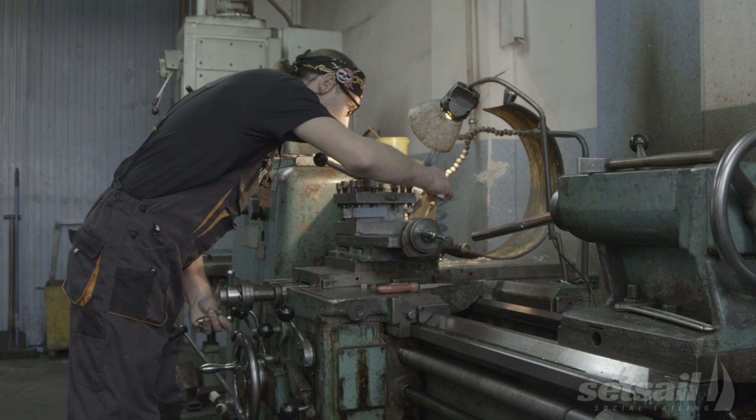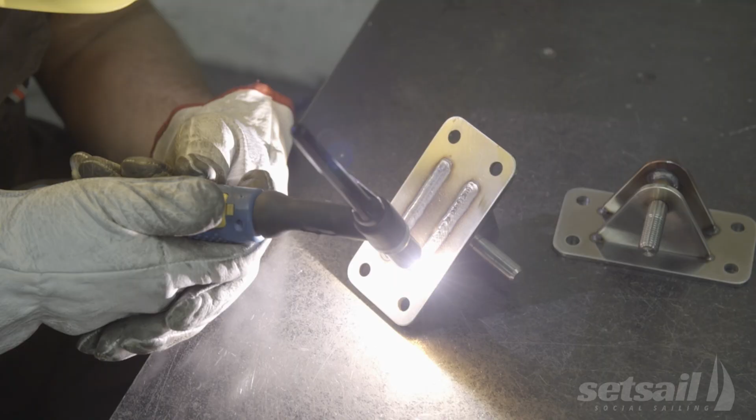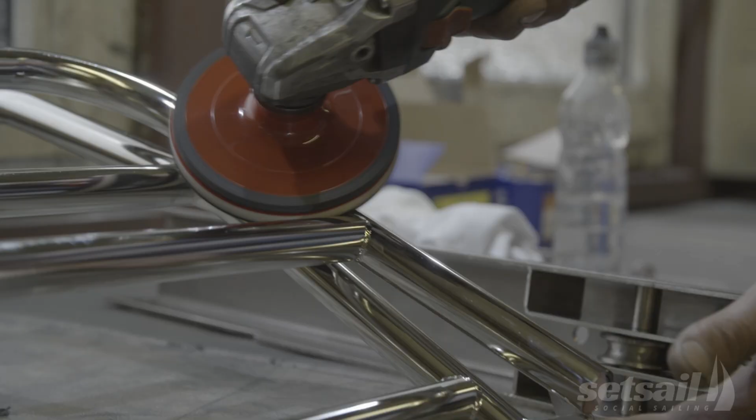The process begins in our ironworks. Our fittings are made here. We make all of them ourselves. Each element of the yacht is precisely designed. We see the welding post. We weld with TIG, which is a modern welding technique. Each of the elements we handle is bent, cut, ground and polished. Proper preparation of the steel elements is a very important stage, preceding the works on the creation of the hull.

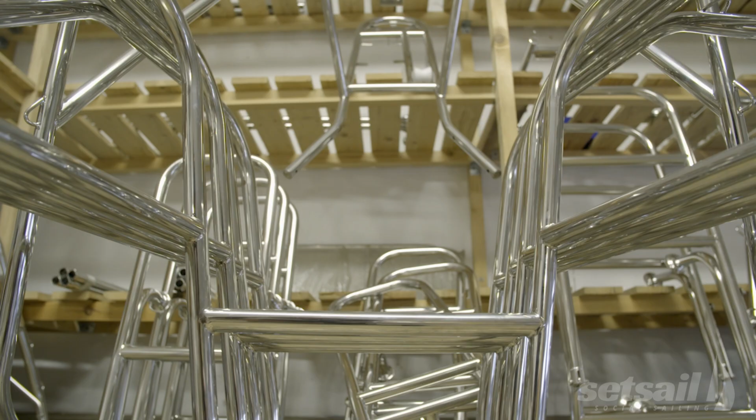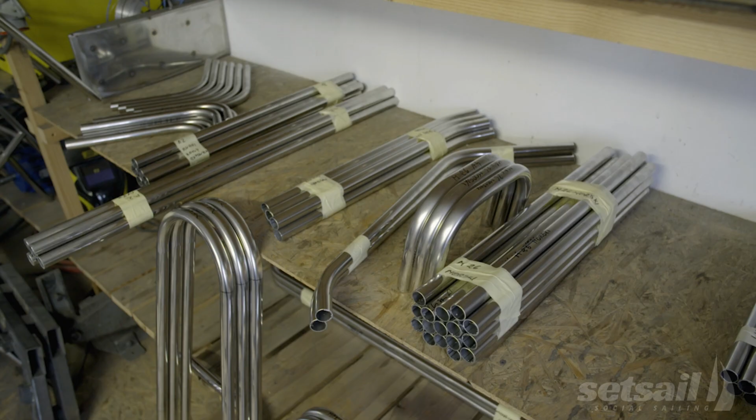Most yacht shipyards don't produce these elements, but order them from subcontractors. However, this shipyard has its own ironworks, where most of the fittings for the yachts produced here are created on the basis of the sketches and models prepared by the designers. Only the highest quality steel resistant to aging and tough weather conditions is used for their production.

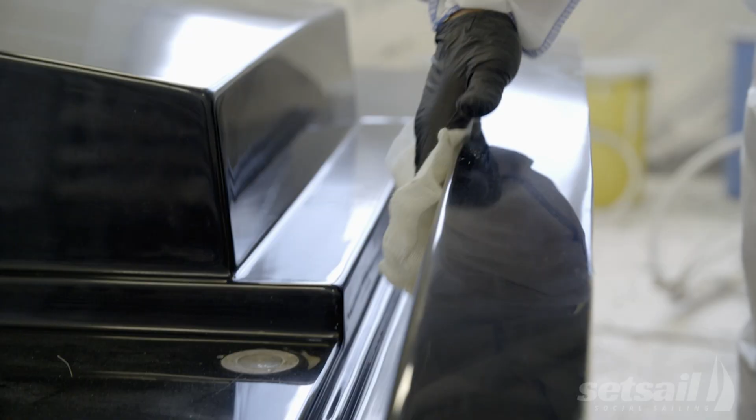The preparation of the product form is currently in progress. The varnishing machine operator has to clean it like a mirror. They have to remove all specks from its form so that the varnished form, when removed, is nice and clean, not having any stains or contaminations. Next, the product will be varnished.

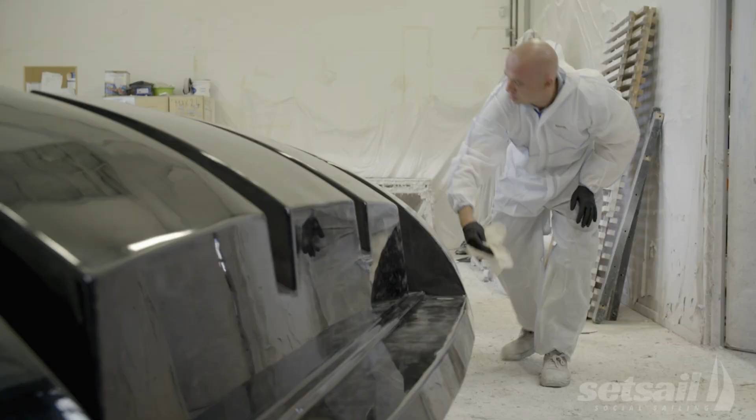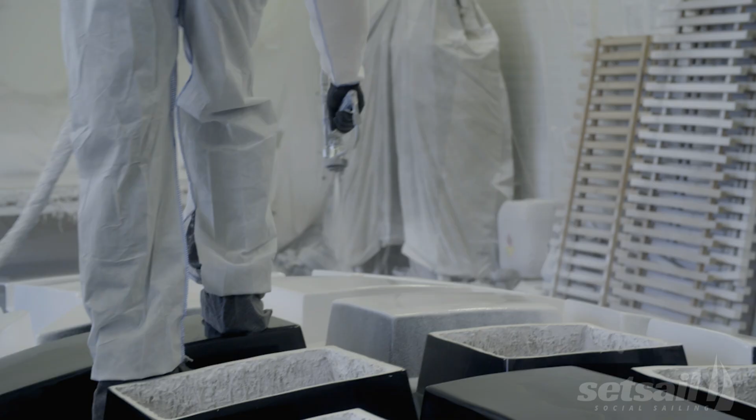An appropriate layer of gel coat will be applied. Then, we'll take measurements in various places. This is mandatory. If this operation is successful, we can apply the mat on it. If there are any small flaws in the form of incorrect, inadequate thickness of the gel coat in some places, this form has to be properly varnished.

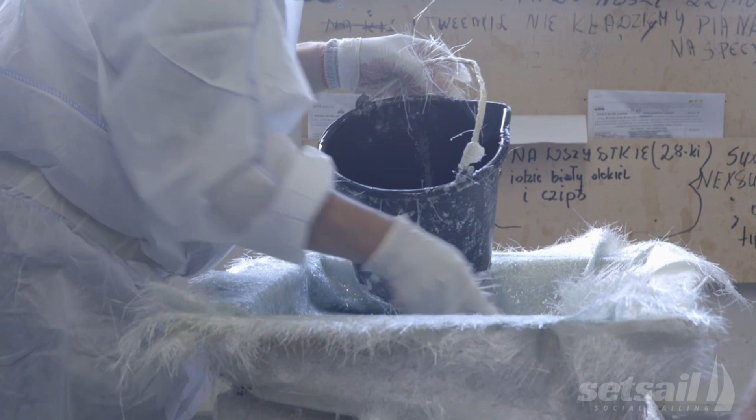The preparation of the form and the laminating process is handled in a separate zone specifically prepared for this purpose. Laminating consists of covering the product with a glass fiber mat and saturating it with a special synthetic resin. Resins used for laminating are flammable, and inhaling the vapors created during the laminating process can be very dangerous. This is why the crew in this zone has to work in special masks and wear protective clothing.

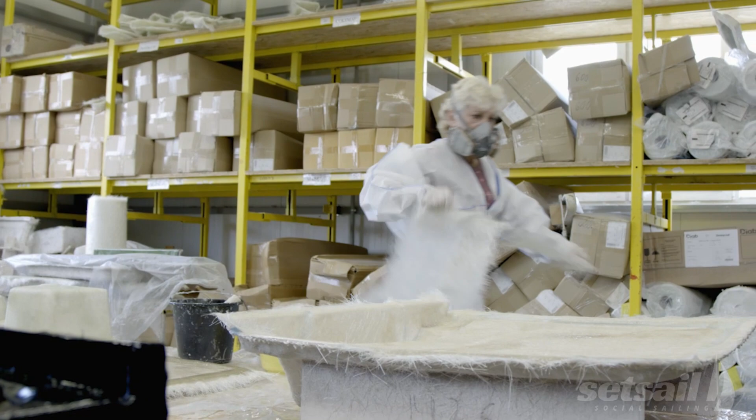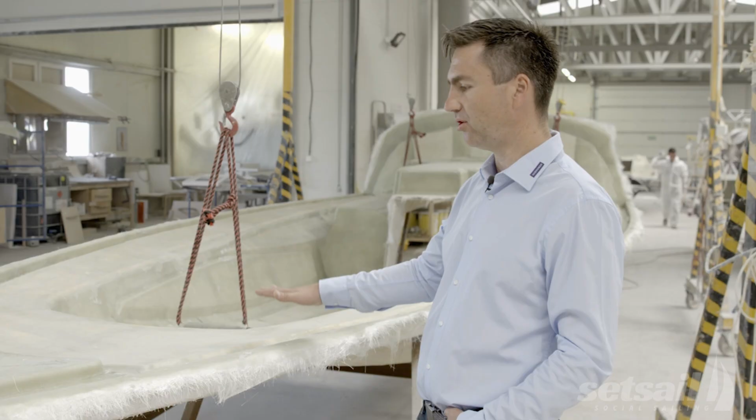The workers manually apply subsequent layers of laminate. The resin is applied and then squeezed into the fabric with the use of rollers. The point is that the resin has to perfectly saturate the layer of the glass fiber structure. We've got here a finished product which went out of the laminates department and is now at the gluing department. This is the Maxus 26 deck.

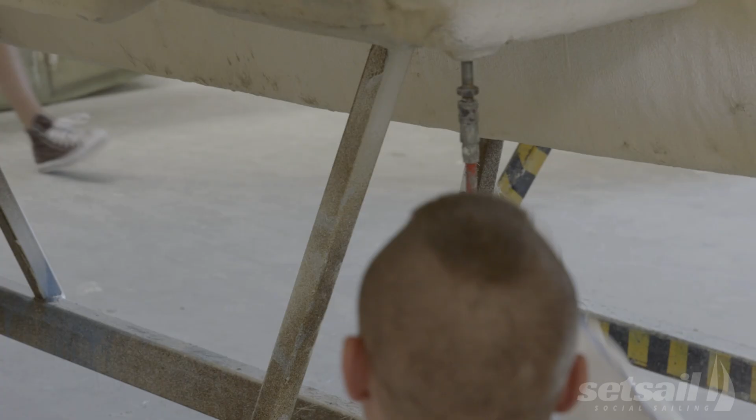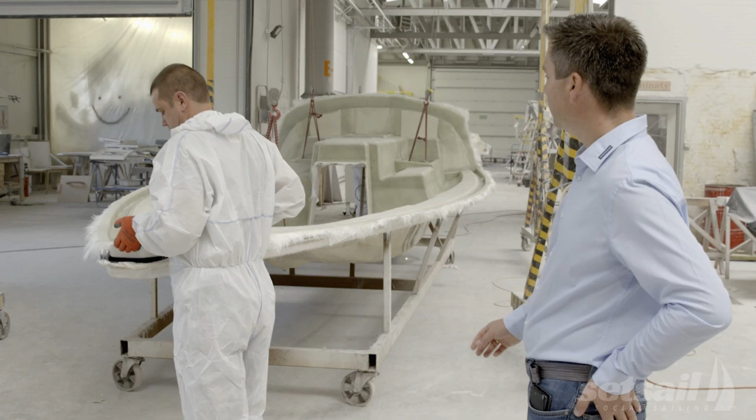It already has a full mat diagram placed. It's also equipped with reinforcements, which will later on be used for fastening all the fittings. We've prepared this product to unform it, meaning remove it from the form. You can say that unforming goes pretty well. The waxes were applied properly, and in a moment we'll blow compressed air inside the form and hoist it up.

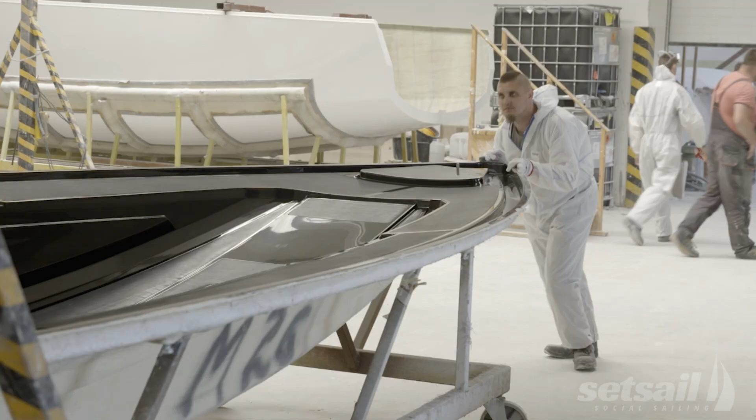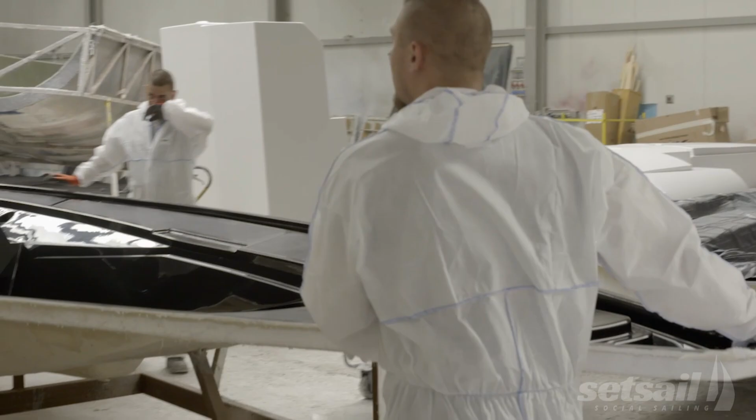In order for the laminate to reach appropriate stiffness and durability, the lamination process is often supported by vacuum pumps, which help press subsequent layers and get rid of air bubbles. A well-made laminate is a very durable and resistant material. This is the basic method of building contemporary yachts.

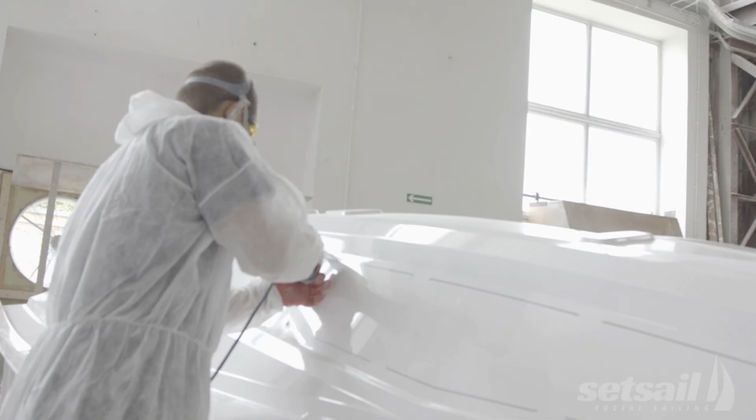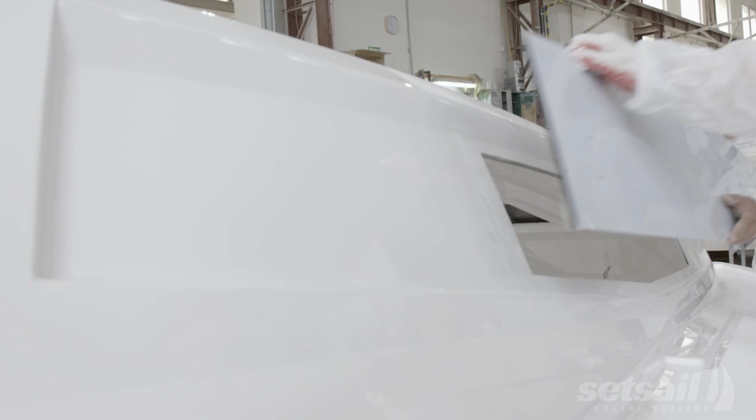Now we see how the varnished, unformed product looks. How important are all the nuances, details, which we have completed before. How important it is that the person who laminated it did all the tasks very carefully, so that everything's filled perfectly. There are various embossed areas ready for windows, which we will cut out later. The anti-slip surfaces on the deck are already prepared. This is a ready sailing yacht deck.

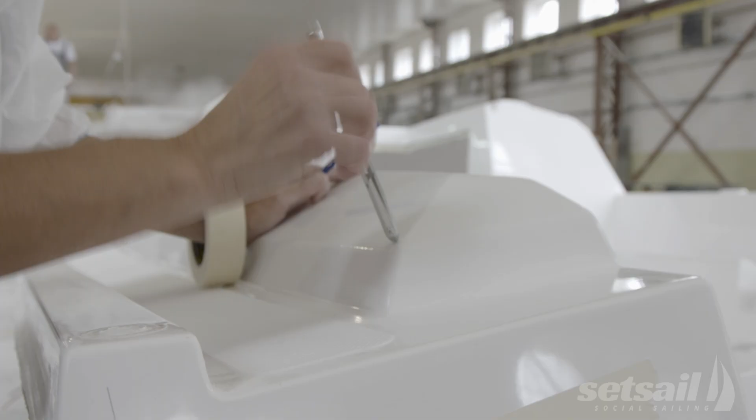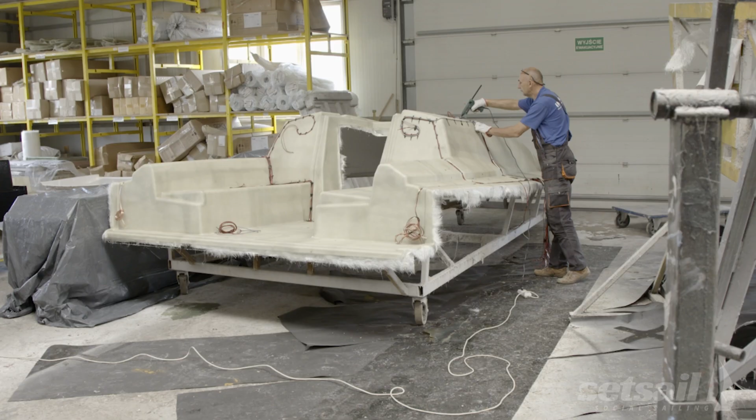After unforming the product, excess laminate, which is covering the surface, has to be cut off. After completing this task, you can proceed with the control of the product. In a moment, the edges will be cut off and all the necessary holes will be carved. Then the workers will prepare the surface for gluing the roof lining, on which the wire harness is located.

Our hull's ready, unformed from the form. We've transported it with the hoists to the gluing department, and we are going to put it on the prepared surface now. This is where the gluing process will take place. Before this process begins, we have to level this bed, profile the hull, and only then can we glue the product on the ready bed.

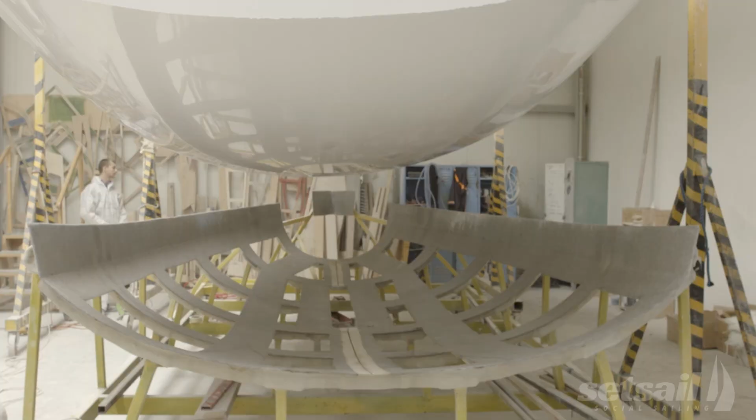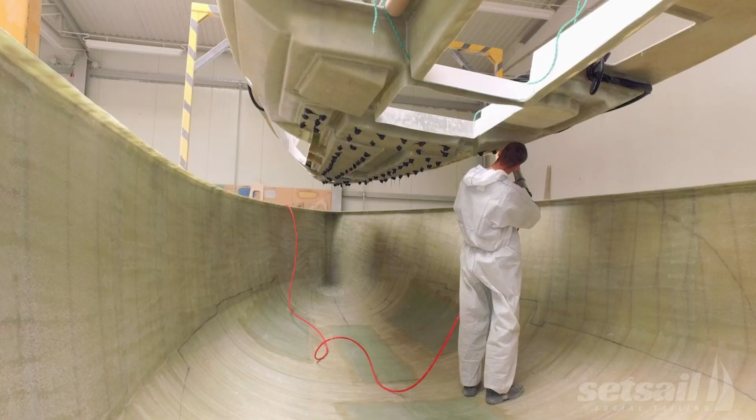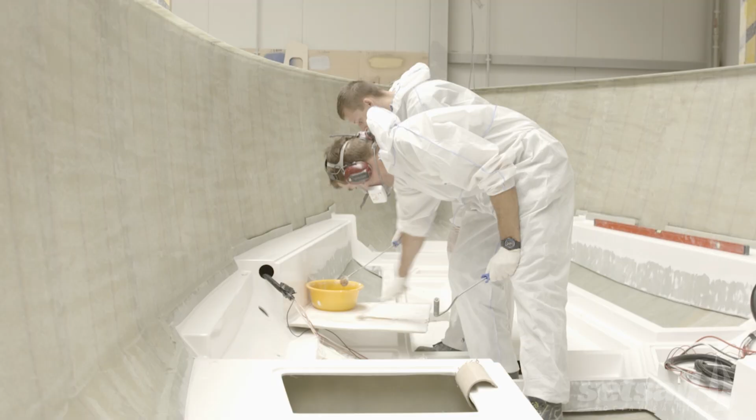The hull has to be perfectly compliant with the project. Leveling and profiling the hull is the most important thing after removing it from the form. Laminate with such a surface bends and twists. You should set its parameters in compliance with the documentation and glue the reinforcements, bracing, bulkheads, or as in this case, a bottom pad in the specified places. The hull will get its full stiffness only after gluing the building elements and connecting them with the deck laminates.

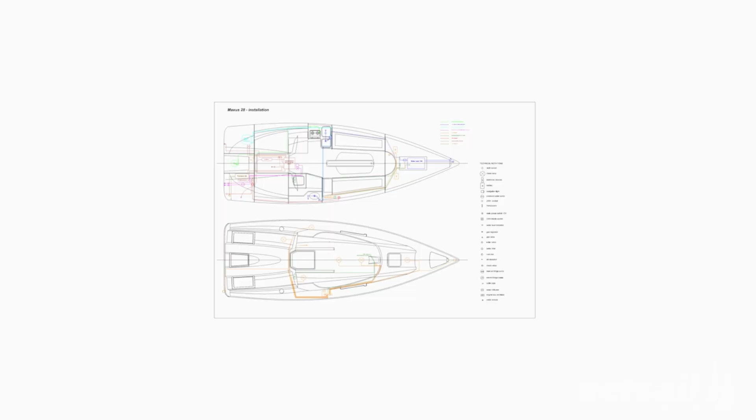Before a yacht is made, first its concept has to be created. We get an outline of such a yacht, how it's supposed to look, from our designer, who currently is Jacek Daszkiewicz. We get such an image in 3D. When the first drawings of such a yacht are ready, we are able to compare it to the previous projects and to the trusted, or not, technical solutions. As soon as we get full acceptance, we proceed to drawing the yacht in full detail.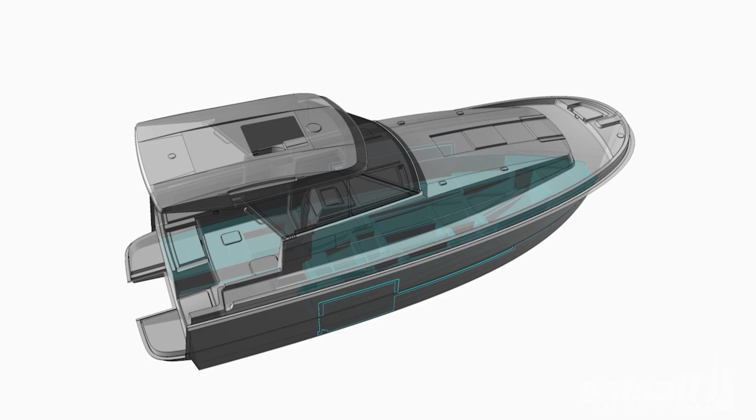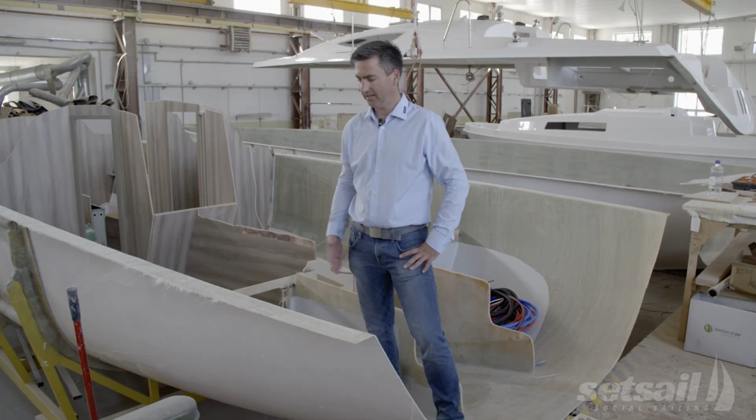We're in the yacht structure department. The yacht we can see is the Maxus 33, the biggest of the yachts we produce, in which the partitions and separate elements were placed in the bottom pad, which you've already seen during the previous stages. We can build such a yacht in any color. This is water-resistant plywood covered in HPL laminate, much more resistant than natural veneers. Finishing this yacht will begin after gluing the entire hull with the deck.

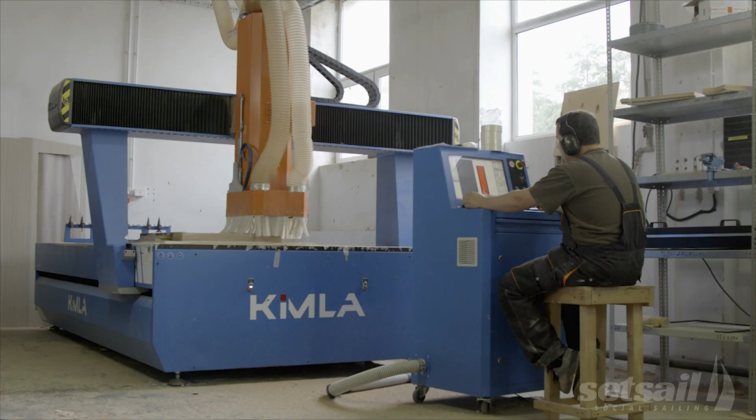All the structure elements are made here, in the carpentry shop. It's here where the material is prepared. The water-resistant plywood boards are glued with the HPL laminate imitating the type of wood chosen by the customers. HPL doesn't differ visually from natural veneers. It's more durable and resistant to moisture. The structural elements of yachts are milled, cut and painted in compliance with the specifications ordered by the customers and then mounted on the hull.

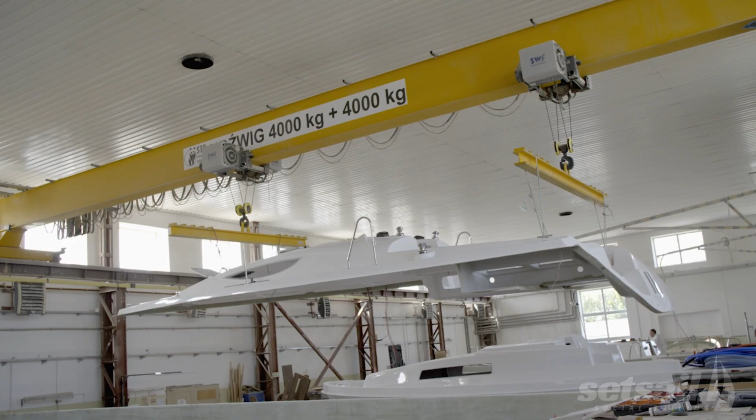You can see a prepared deck, which is transported with a crane to the post where it'll be prepared for gluing. It's too heavy for us to lift it. The edges will be polished, their connection places will be marked out, and it'll soon go back to the post here to be glued. Connecting the deck with the hull will be done by applying a layer of glue and squeezing these elements against one another.

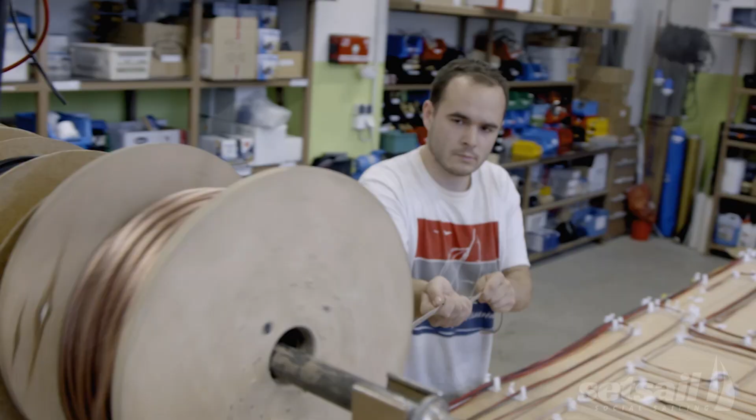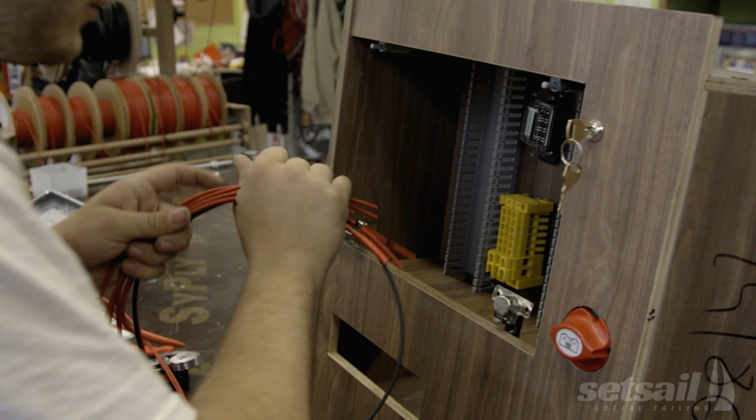Before connecting the deck, let's visit the electricians. The wire harnesses are made here and various devices are prepared for mounting. Contemporary yachts must be safe and comfortable. That's why they are equipped with more and more devices, from lighting through navigation and measurement devices up to sanitary installations. All of these require electricity. Electrical harnesses are mounted during the gluing and on the stage of mounting the hull structure. Here, most of them are already in place.

Now you'll be able to see how the connection of a deck with a hull looks on a partially furnished yacht, Maxus 33. The deck is fully fitted. The deck windows and hatches are mounted there. The wires are there and so is the roof lining. Some of the elements are already furnished. The elements are fitted. Right now we'll place the control points next to the connection of these two elements.

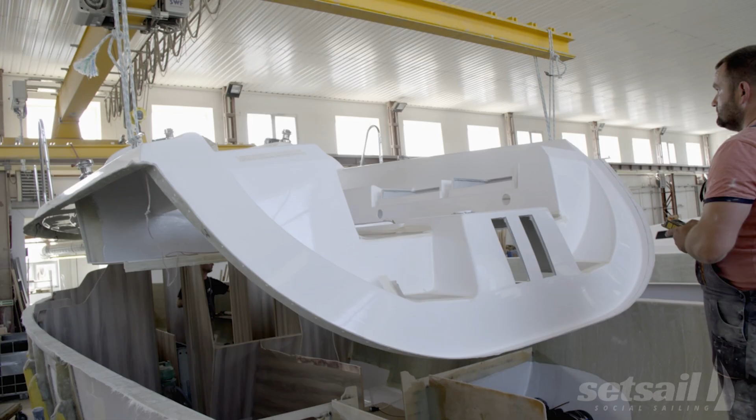We are currently lowering the deck to the hull. As you can see, these are complete elements ready to be put together and form a yacht.

The yacht's initially fitted. The mounting of most of the structure is complete. It's time for the upholstery. It's here where the fillings and upholstery of bunks, seats, supports and cushions are made according to the client's liking. The elements of the roof lining and other internal upholstered surfaces are also prepared here.

Modern synthetic materials are used for the production of upholsteries. These materials are resistant to dirt and to moisture, pleasant to the touch and exceptionally durable. The next stage is the final mounting. This is the final stage of yacht building.

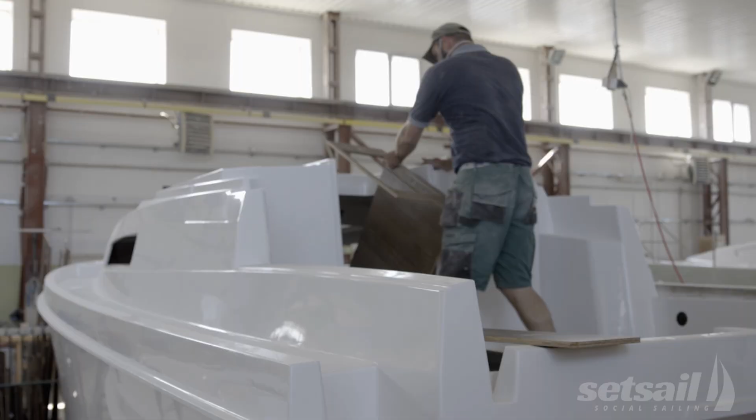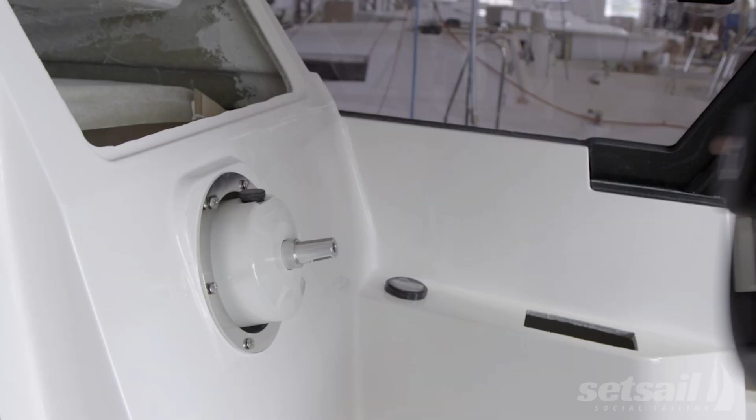The previously handled electrical, hydraulic, sanitary systems have to be connected with appropriate devices in compliance with the order specifications. In sea yachts, these are often advanced navigation systems, allowing to steer the yacht in any weather conditions, modern galleys equipped with refrigerators, freezers and ovens, stationary engines, power generators and solar panels, as well as dozens of other systems allowing to sail safely and comfortably.

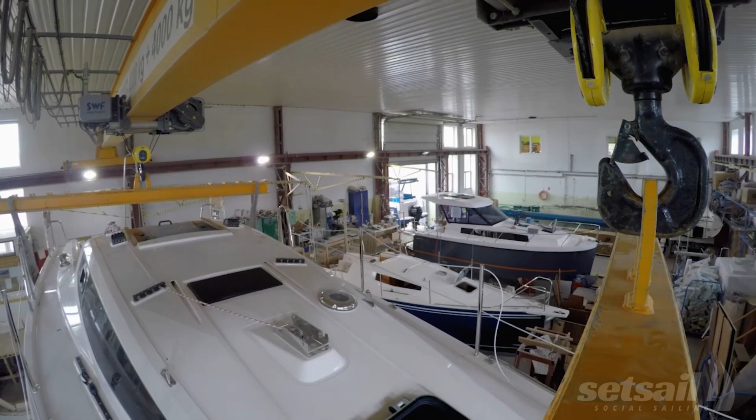In the case of inland yachts, the list of devices is much more modest. When sailing on lakes, you'll call port almost every evening. The sea and the inland define the various needs of the sailors. There is an absolutely universal problem though. Both at sea and inland, the weather factor is very important. The yacht has to be tight and dry inside.

After placing the yacht in a pool, we are able to check its tightness from the bottom, from the hull side, as well as from the deck side, using a sprinkling machine. We simultaneously check the installations, window tightness, the tightness of all installation connections, the operation of all devices mounted on the yacht. Thanks to this test, we are able to check the yacht here and not at the customer's premises, let's say 100 or 1,000 kilometers away from the shipyard, which makes us save on a lot of the costs.

The water test in a pool and with sprinkling machine is the final form of quality control. If the yacht passes all checks, the production process can be considered as successfully completed. However, in practice, the final quality control is done by the client. It's the sailor who has to check if the yacht is comfortable and dry, if it sails well and is user-friendly, if it reacts to the rudder correctly, and if it copes well with bad weather.

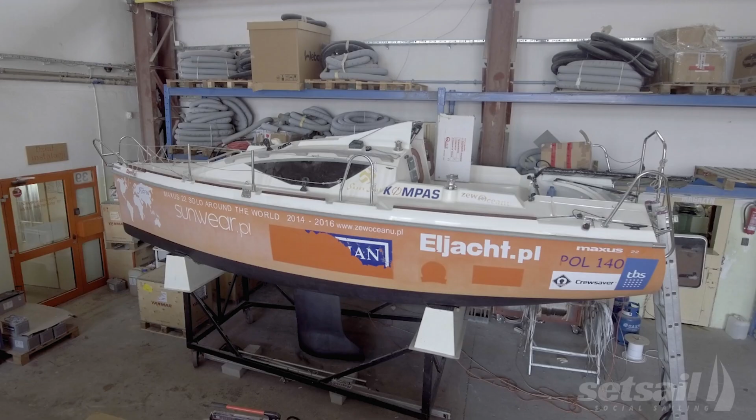We are very lucky today. A very unusual sailor came to visit us. Szymon Kuczyński sailed round the world in the smallest 6-meter yacht produced by Northman. Atlantic Puffin is one of the smallest yachts which sails through all of the oceans.

For me, it was important that I could visit the production site and take part in building the yacht, not just get the final products and then, when at sea, start wondering how it works. A sea sailor has to repair everything by himself, so it's very important to know where a given screw is located, what type of screw it is, and which wrench you need to use.

Most importantly, these are good quality boats, from the very beginning designed for sailing, not only inland but also in the coastal or sea zones. Apart from that, the atmosphere is great here. That's why my Atlantic Puffin Maxus 22, a small but very much oceanic boat, was built here.

The boat is after completing a voyage around the world, and we actually haven't done any constructional changes after returning from the trip. The boat survived the previous voyage in very good condition. In 3 weeks, the boat is setting off for another voyage around the world.

When I turned 40, I had the chance to get here from a totally different line of business. I could barely tell the difference between a bow and a stern, and my boss said, "We don't build spaceships here, so you'll just be fine." And that's how it started. We built 67 units in the first year, 88 in the second, and so it was growing and growing. Now we make almost 150.

We implement a new type of yacht each year. These are constant challenges, new issues we have to deal with, including electronics, ballasting sails. These are modern propulsion solutions for these units. A lot of novelties which don't let us get bored at work. People who work at our shipyard are outstanding persons. They are able to make all equipment for these vessels, and this is priceless.

The people who make these yachts are also people I've met in my path. They often share my passion related to boating, to sailing. Just as myself, these people have learned how to build yachts from scratch. We've passed a very long and difficult road. We've had the chance of beginning when sailing was being born and developed along with us.